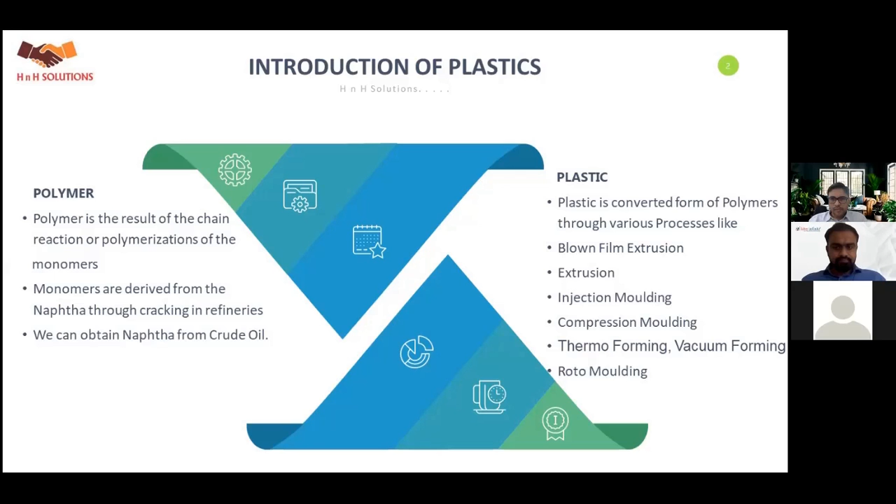Plastic is a converted form of polymers through various processes like blown film extrusion, cast extrusion for film, extrusion for pipe and profile, calendering for sheet, injection molding for chair, injection stretch blow molding for jars and bottles, compression molding for blocks and sheets, thermoforming and vacuum forming for tray and containers, rotomolding for tank.

Why do we need packaging, or what are the advantages of packaging? It gives an attractive look. Packaging material is a silent promoter of any product. It supports brand building and promotion. It has better printability, gloss, transparency, opacity, and strength.

It is easy to handle, easy to process, versatile in any climate like summer, winter, spring, or monsoon. It is lightweight, flexible in nature, requires less space in container, and easy to stack. It gives value addition to product at low cost. It is pilfer proof and helps increase shelf life of the packed product.

It has excellent resistance to water, oil, grease, acid, alkalis, and aggressive chemicals. It is neutral in nature and non-reactive with products. It has low migration, so it does not contaminate the packed product.

It is non-corrosive in nature, and we can add additives to increase properties like physical, mechanical, chemical, optical, thermal, or electrical. It is 100% safe and secure for food, pharma, drinking water, beverages, and other products. It gives protection against sunlight, gas, moisture, and cross contamination. It restricts cultural growth of microbes, virus, bacteria, and pathogens.

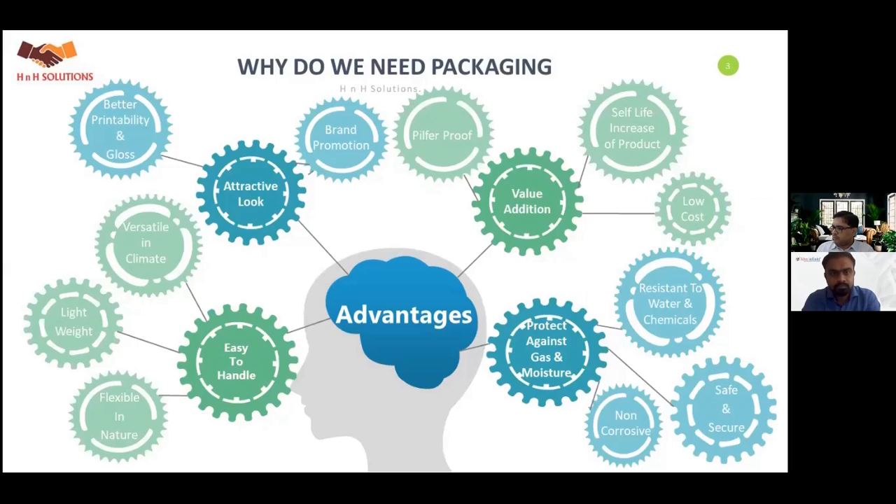What are the advantages of plastics against other conventional materials, or what are the limitations of other materials used in packaging? The first is cloth. Cloth is non-hygienic; there are chances of microbial growth and contamination. Paper, majority of papers are extracted from wood pulp, so it leads to deforestation and global warming.

Metal, almost all metals are corrosive in nature. Toxicity is higher than plastics in several cases. They require high energy to process, so carbon emission is also high. Glass, the major limitation of glass is its fragile nature. It also requires high temperature to process.

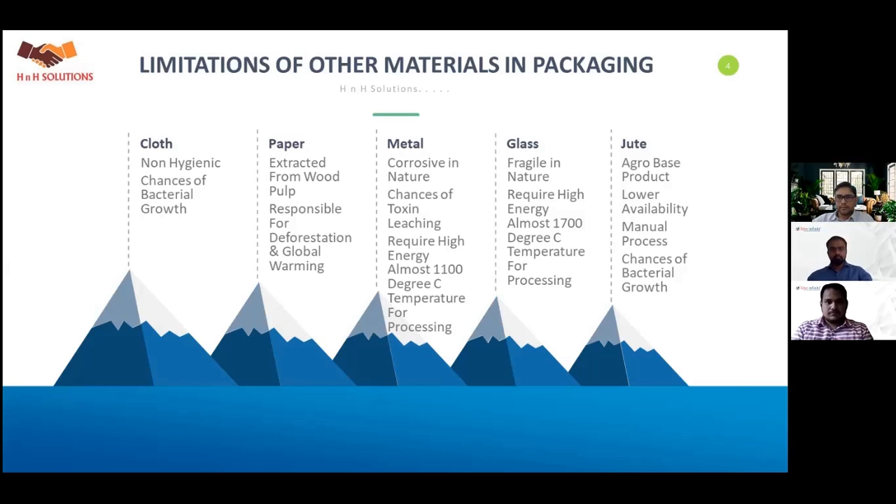Jute is an agro-based product, so availability issues are there. Process of manufacturing is somewhat manual and tedious. Chances of microbial growth are very high because of permeability for gas, moisture, air, and dust. Whereas plastic requires low energy to produce, low carbon emission as compared to other conventional materials, low transportation cost, high barrier, and low chance of microbial growth.

Types of packaging: mainly there are two types, flexible packaging and rigid packaging. Flexible packaging includes bags like carry bag, woven fabric bag, non-woven fabric bag, pouches like small sachet and jumbo pouch, trays like flexible tray for dates, rigid tray for sweets, even punnets for fruit packing fall into the flexible packaging category.

Now, rigid packaging includes bottles having different volume and weight capacity, jars with different shapes, with or without lid, foil, or wet seal, containers flexible for fruits and rigid for food gravy.

Major raw materials used in packaging are granules, film, ink, adhesive, solvents. Cylinder and rubber rollers are changeable parts of machinery, and bearing, doctor blade, BOPP tape, etc. are consumables. So normally this type of terminology is used in the flexible packaging industry.

Now film: various films like polyester film, Alox coated polyester film, metallized polyester film with different thickness and width are available. Polyethylene film like butene, octene, Dowlex, metallocene, hexene are different grades. Aluminum foil with different thickness and width. Paper like glassine paper, chromo art paper, poster, craft, maplitho.

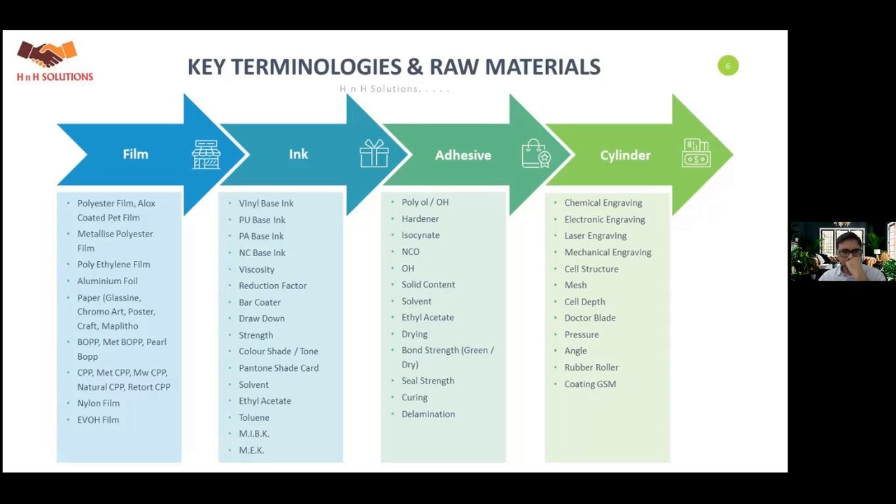Bond strength is a QC parameter, like green bond strength and dry bond strength. Heat seal strength is again a QC parameter. Curing or cross-linking is required to have optimum strength. Delamination happens if drying, lamination or curing is not proper.

Then cylinder. Majority, there are 4 types of cylinder engraving processes: chemical engraving, electronic engraving, laser engraving, or electromechanical engraving. Cell structure, mesh, and cell depth are different for different engraving processes.

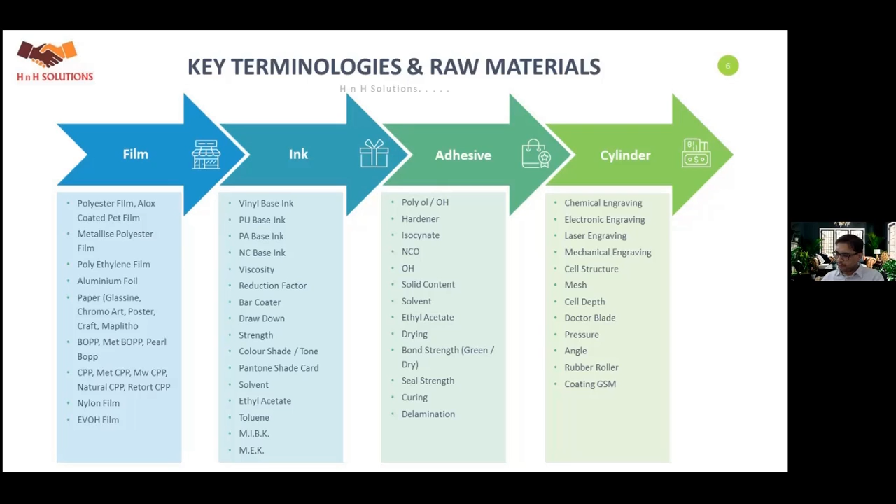Doctor blade is required to wipe off the excess ink or adhesive. Rubber roller is required to transfer ink or adhesive from cylinder to film. Doctor blade's pressure and angle is required to adjust the coating GSM.

Now, which kind of machineries are used in flexible packaging? The first one is a multi-layer blown film plant. It converts granule into film having different width and thickness. Many types of multi-layer blown film plants are available, like 3-layer, 5-layer, 7-layer, 9-layer, 11-layer. Even cast film process is also used to make film.

Then rotogravure printing machine to print on polyester film, BOPP film, PVC or paper. CI Flexo is also advanced technology than rotogravure printing machine. CI Flexo has several advantages also, like precise printing, low ink consumption, and high speed, or we can say higher output.

Various types of lamination machines are available, like solvent based, where solvent is used to increase the handling characteristics; solvent-less; heat and press for pharma foil; extrusion coating; hot melt for soap wrappers; cold seal for chocolate and confectionery; slitting machines like turret and drum type.

So there are two types of slitting machines majorly available. Then bag making machine like flat bottom gusset, stand up, zipper, and multi-purpose. So the first process is printing, then lamination, then curing or cross-linking in natural condition, then slitting. And if customer does not have automatic form fill seal or packing machine, then bag making process is required.

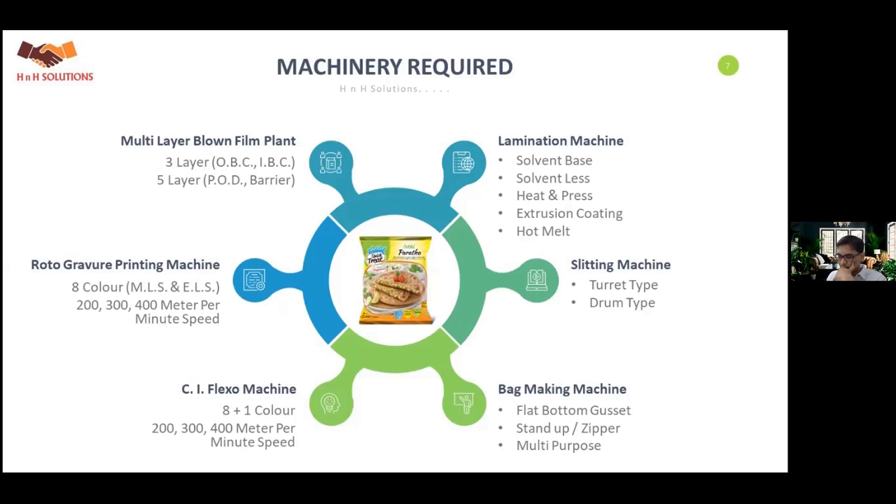So, multi-layer blown film plant - as I said earlier, it converts granules into film. Major manufacturers are Rajoo Engineers, Windsor, and Kabra Extrusiontechnik.

Many types of multi-layer blown film plants are available, like outer bubble cooling 3-layer or 5-layer plant for general to medium output, inter-bubble cooling 3-layer or 5-layer plant for medium to high output for better clarity and transparency. Then POD 5-layer plant for high barrier, high strength. It also gives high hot tack strength, so we can pack bulk products like 5 kg, 10 kg, 15 kg from this film.

Barrier layer plants like 5-layer, 7-layer, 9-layer, 11-layer are available to produce nylon or EVOH film for oil, ghee, vacuum, and thermoforming applications. It gives high barrier against gas and moisture.

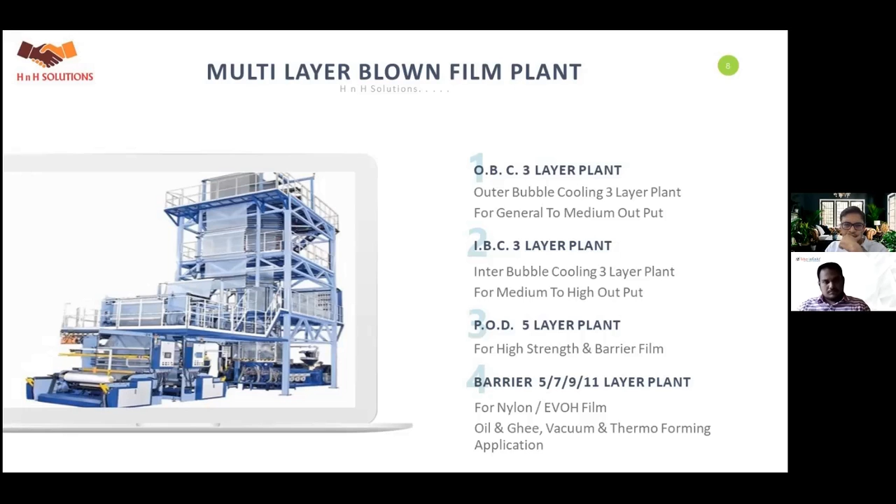Rotogravure printing machine. Rotogravure printing is done through rotation of an engraved cylinder. This process has lots of advantages over other processes, like it is a continuous process and has very good output with superb accuracy. It is normally used for long production processes.

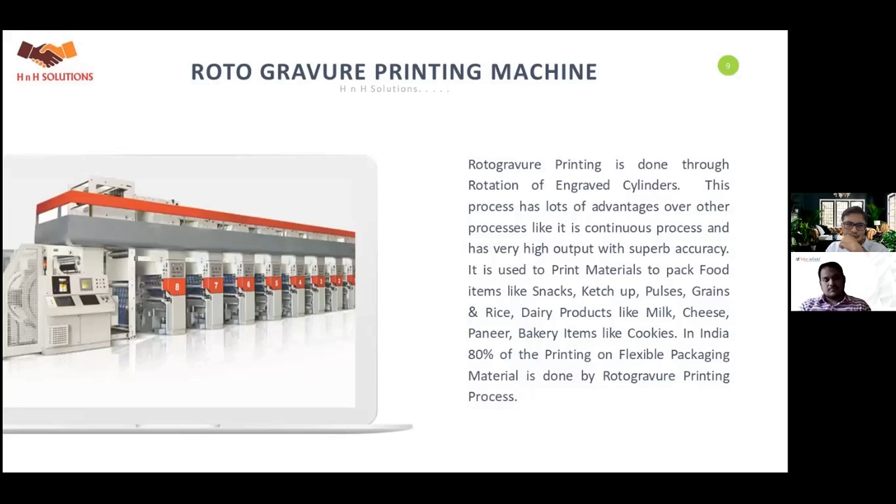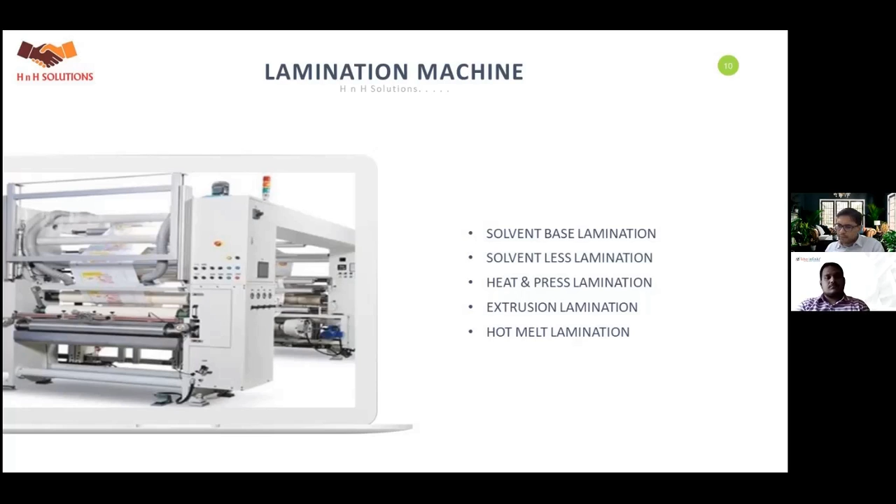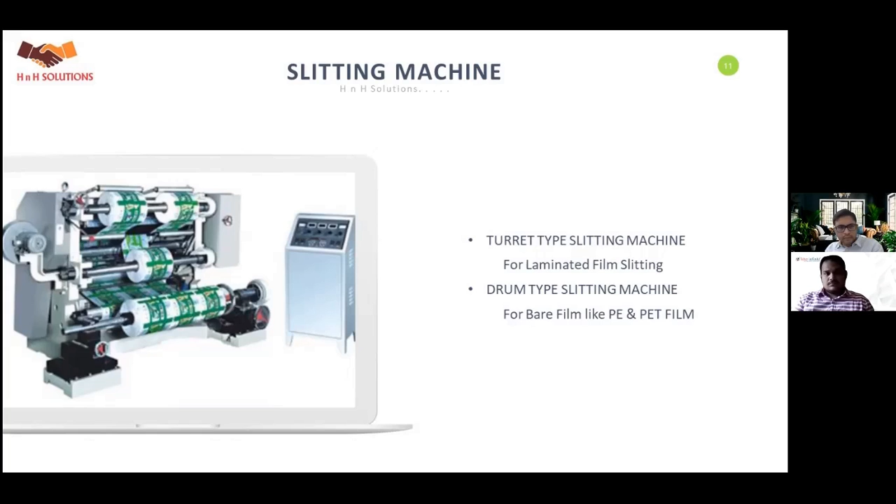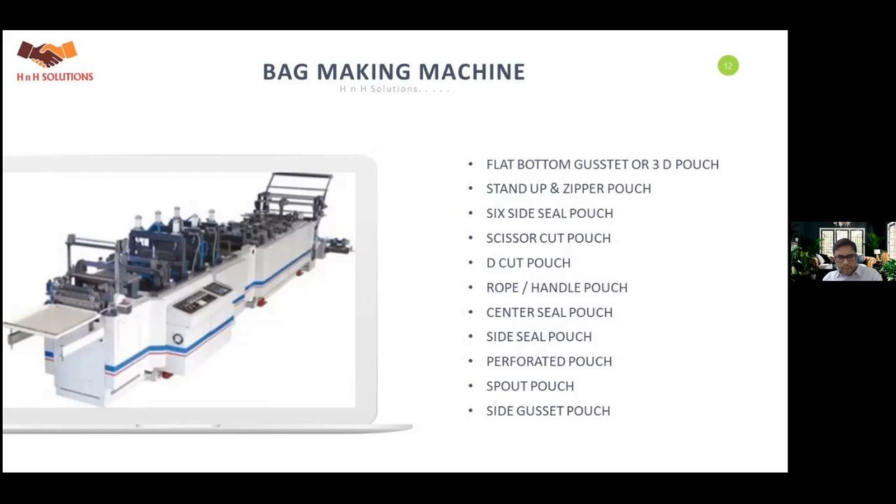Bag making machine. There are various types of bag or pouch making machines available to produce flat bottom gusset or 3D pouch, stand-up pouch, zipper pouch, six-side seal pouch, scissor cut pouch, D-cut pouch, rope and handle pouch or loop handle pouch, center seal pouch, side seal pouch, perforated pouch, spout pouch, side gusset pouch, shape pouch, laser scored pouch, lap seal pouch, retort pouch, jumbo pouch, etc.

We can supply packaging materials to various industries like frozen food manufacturers, frozen vegetable packers, seafood packers, tomato ketchup manufacturers, mayonnaise manufacturers, spices manufacturers, condiments manufacturers, tea and coffee packers, FMCG product manufacturers, pulse, grains, rice packers, pharmaceutical, cosmetic and herbal.

Or healthcare companies, agriculture products like seeds, pesticides, herbicides, fungicides and insecticide, organic and micronutrients and fertilizer manufacturers, disinfectant like chlorine manufacturer, cement manufacturer, synthetic adhesive, paint, chemical manufacturer, lubricant, automobile, oil, grease, auto parts, bearing manufacturer, detergent, soap, hair oil, hair henna and other toiletries manufacturer, edible oil, vegetable oil, ghee manufacturer, milk and dairy products like paneer, cheese and khoya packer, bakery products like biscuits and toast manufacturer, confectionery, chocolate, Cadbury and ice cream manufacturer, soft drink, cold drink and other beverages packers.

So I think this is an interesting part for you.

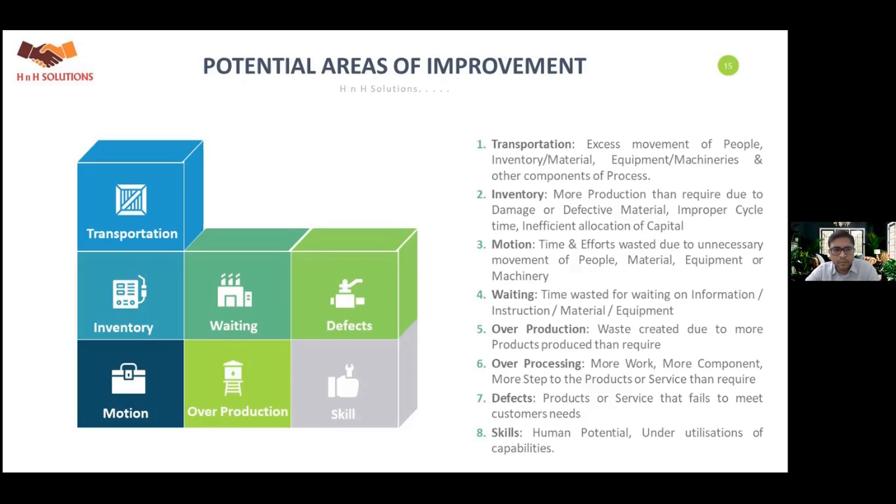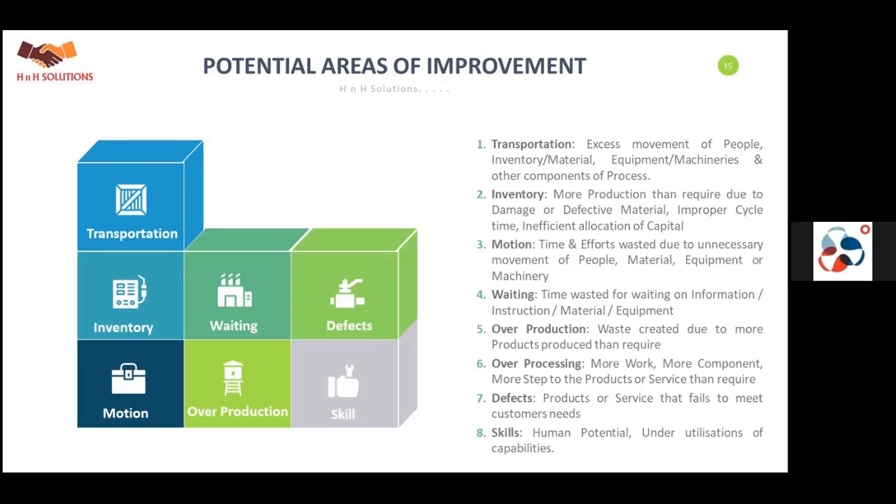Inventory: more production than required due to damage or defective materials, improper cycle time, inefficient allocation of capital. Motion: time and effort wasted due to unnecessary movement of people, material, equipment, and machinery. Waiting: time wasted waiting on information, instruction, material, or equipment flows. Overproduction: waste created due to more products produced than required. Overprocessing: more work, more components, more steps to a product or service than required. Defects: product or service that fails to meet customer needs. And skill: underutilization of human potential capabilities.

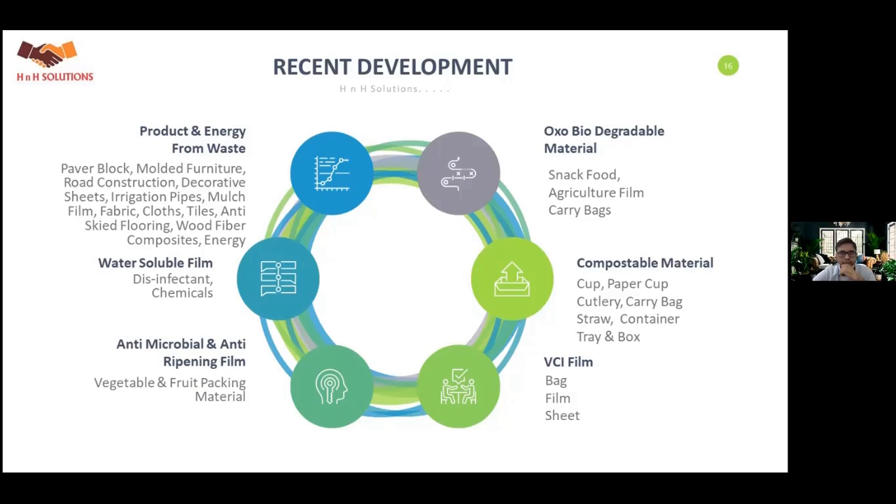In oxo-biodegradable material, the material combination contains almost 97 to 99% plastics and 1 to 3% additive. Compostable material is made from polylactic acid, derived from rice, potato, or corn starch, which is 100% environment friendly material. The major applications are cups, paper cups, cutlery, carry bags, straws, containers, trays, and boxes — all single-use plastic applications.

VCI film, vapor corrosion inhibitor, prevents the product from corrosion. It is available in bag, film, or sheet form. Then antimicrobial and anti-ripening film for vegetable and fruit packing reduces microbial rate in vegetables and ripening rate in fruits, thus increasing the shelf life of vegetables and fruits.

Then water soluble film. This film dissolves in water within a certain time and is used to pack disinfectants and chemicals.

Then products and energy from waste: paver block, molded furniture, road construction, decorative sheets, irrigation pipe, mulch film, fabric, cloth, tiles, anti-skid flooring, wood fiber composites, and other products can be produced from plastic waste. We can even produce energy from plastic waste through the catalytic pyrolysis process. We only need to change our perception from waste to resource.